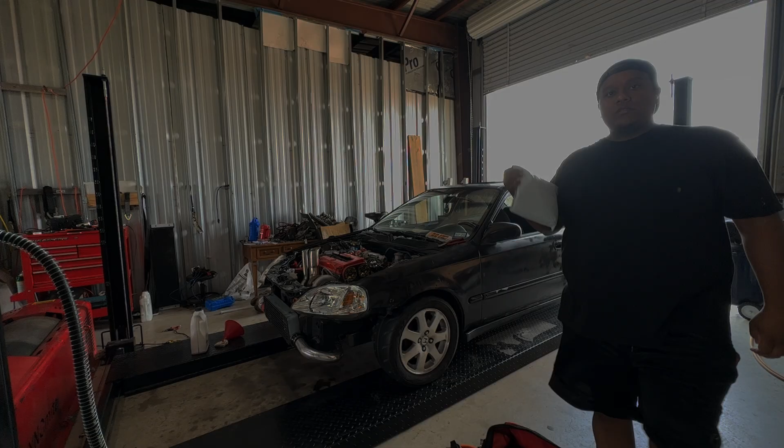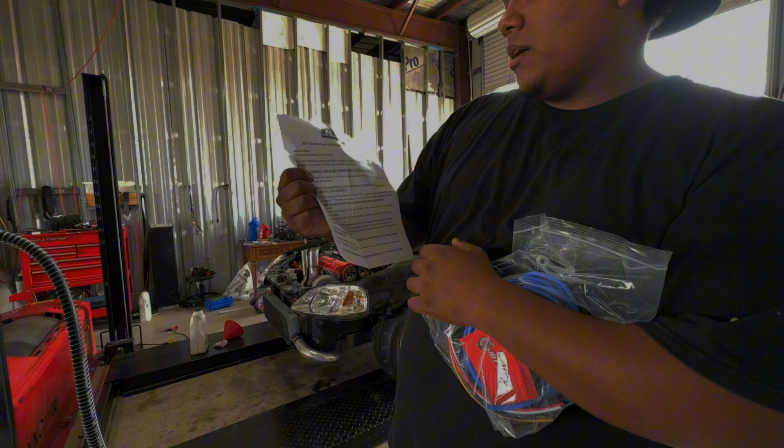What's up, guys? I got the JDT fuel pump hot wire kit, aka relay kit. This is it right here. JDT fuel pump wiring kit, JDT Racing fuel pump rewire kit. It comes with instructions.

Real men don't use those, so you got your hot wire. This is gonna go from your battery, so run it to your battery, but don't hook it up yet. It's got a fusible link here. Basically, you're gonna run this to the back, to your fuel pump, or where you're gonna mount your relay, and then it's got a couple little connectors and zip ties to tuck it away nicely.

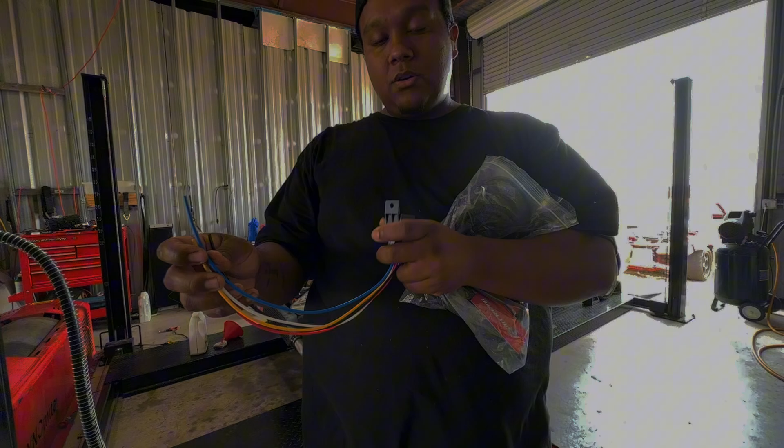And then this is it, basically just a generic relay. All relays serve one purpose: to control the low side circuit to a high side circuit. Really all you're doing is upgrading the wiring so that it doesn't overload the wire. It can melt wires if your pump is pulling too much amperage.

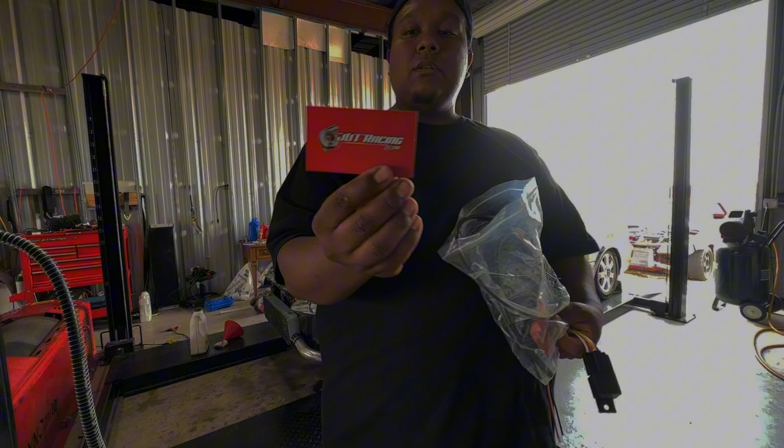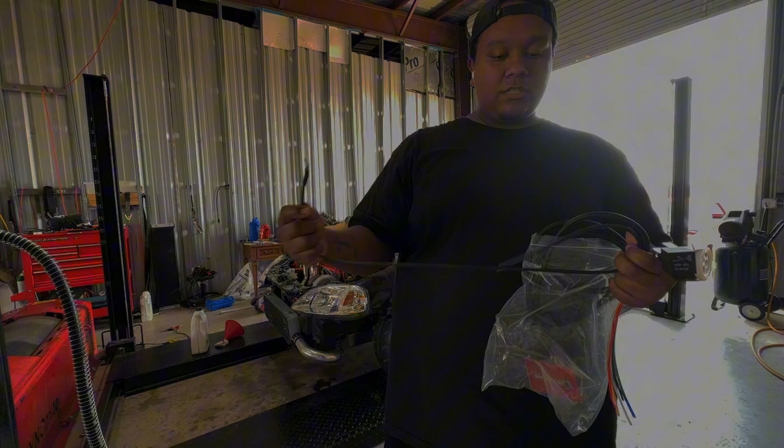Comes with a little separate ground. I like to use this ground for the pump hanger to chassis, even though it's already grounded to the chassis. It gives it more ground doing it like this. I haven't had any issues doing it that way. Then a little bit of loom to hide the feed wire.

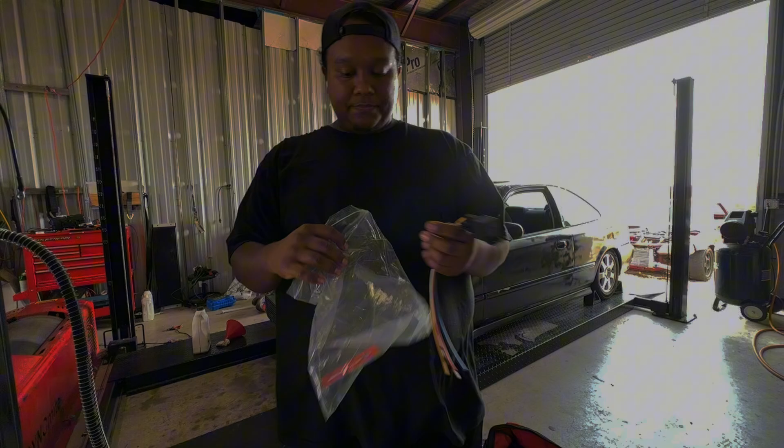So we're gonna get all that into the car. First things first, I like to find a nice place where this is gonna hide. You can hide wires pretty easy if you have enough wiring, but he's got interiors, so I'm gonna find a spot where this will mount or hide away.

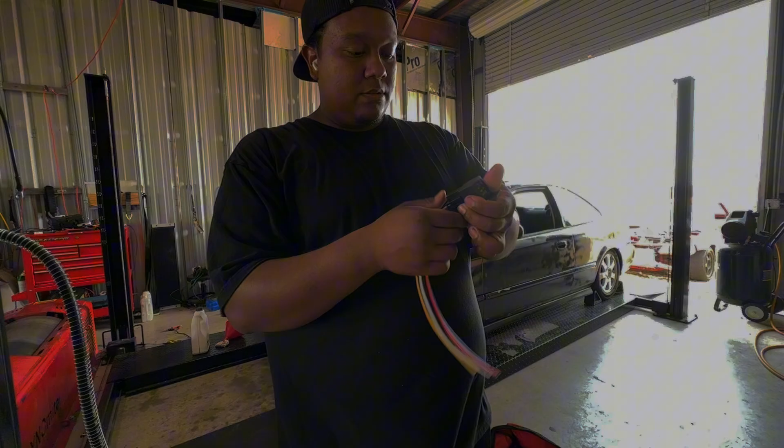Alright guys, quick little recap on the relay kit. We got battery in, we got relay ground, 12-volt signal from the stock pump wire, and then we got our yellow hot wire powering the pump, and we got a standalone fat ground. Keep all the heat and noise out of it. And let me prime it for y'all.

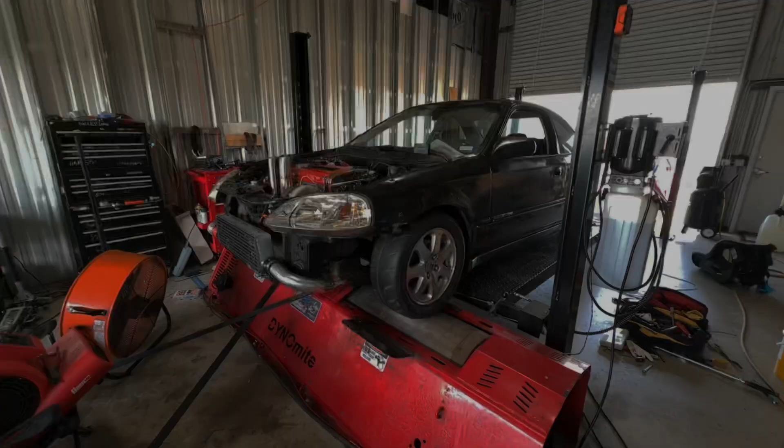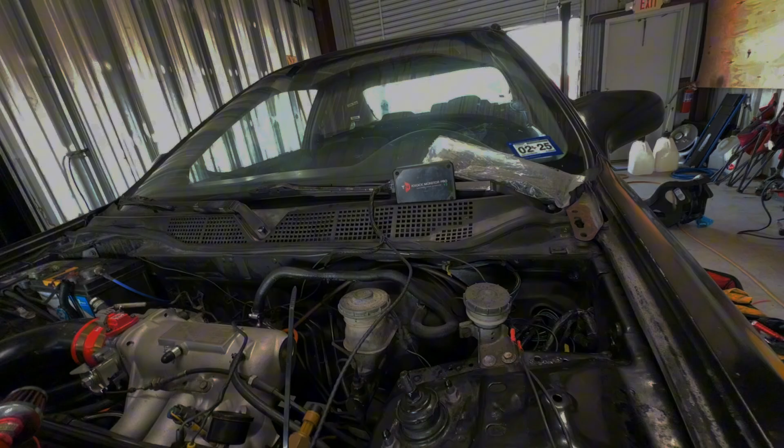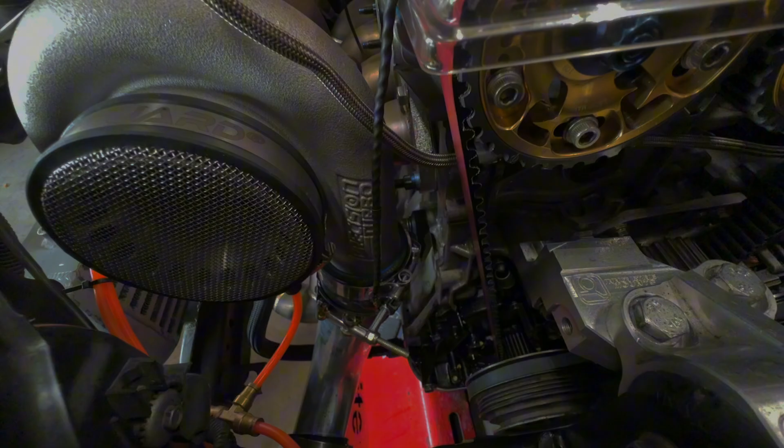Alright guys, I don't remember where we left off, but basically the 2000cc injectors are in with EV1 connectors. I got the injector RPM signal to the knock monitor pro, that is what we're using to make sure we're not in detonation. And the knock sensor is right about there. Yeah, I should be able to see it right there. So pretty much all ready.

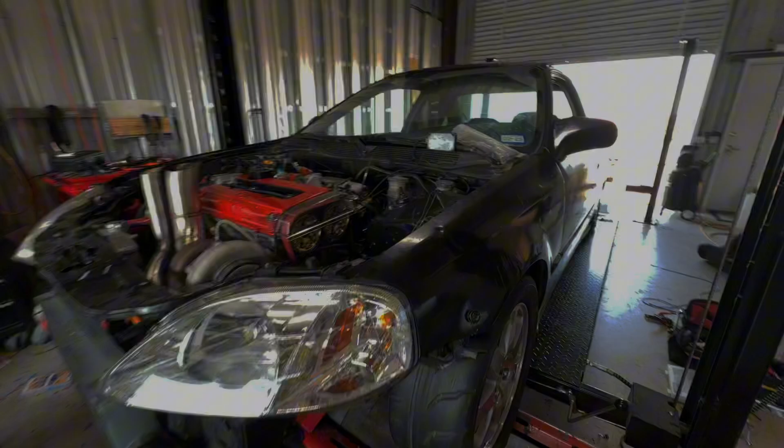Hellcat relay, just to recap: Hellcat 525 relayed fuel pump, E85, 2200cc 100 tune injectors, piston rod, LS VTEC precision 6262. Probably our limiting factors are going to be maybe the intercooler, and we're going to pray that we don't run into any detonation so we keep the stock sleeves alive. It is not block-guarded, no CSS sleeves, nothing - stock block with pistons and rods in it, springs, retainers, type R cams.

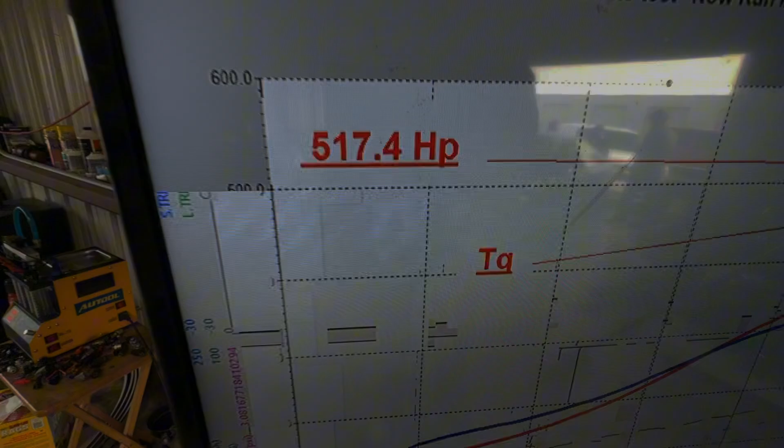Not quite 550, but we're at 517, 21 pounds. We'll let it cool down a little bit. We might try to put a little more in it.

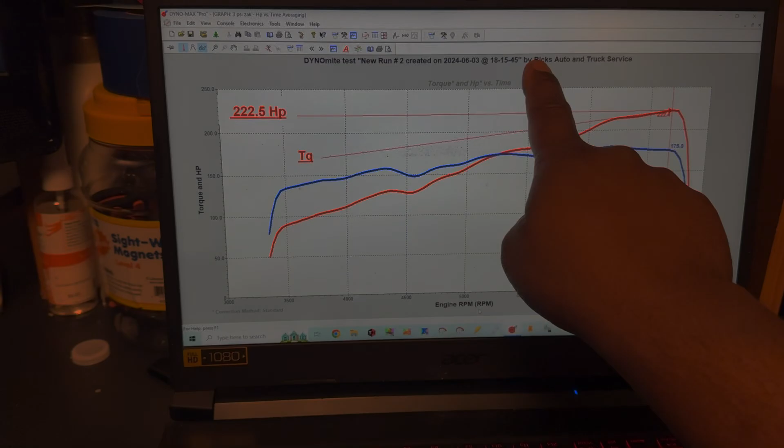Basically all the runs were on the tripod and it filmed the whole dyno session. I didn't talk to the camera or anything, just maybe one time to explain when we stopped around 515. But basically I'm just gonna run through all the dyno graphs. Don't mind this, this is the old owner of the dyno - it's not his test facility anymore. It is here at RACE-ALOT garage now, but I have not changed the license just because DYNOmite is actually no more, so it'd be hard to try to get a new license.

But anyways, here's the runs. We got, as you can see down here, 3 psi, basically all motor. I made 222, and then third pull, I don't know what happened - probably didn't hit the data logger. That was first. This looks like the first VTEC pull.

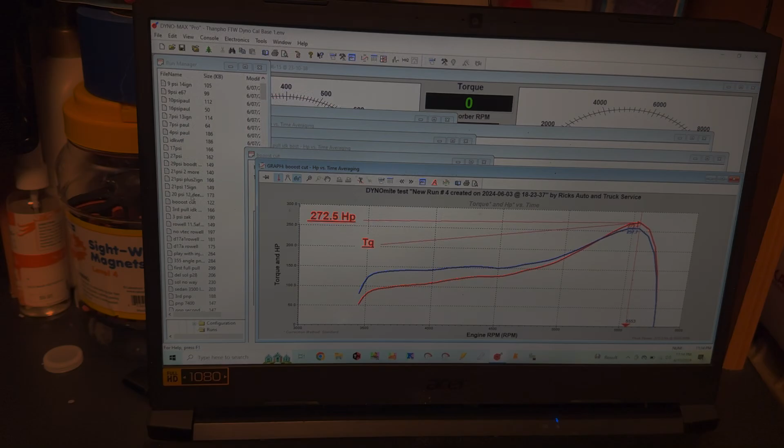Made 324, and then we got boost cut. We can see it was on the way up to whatever that would have been at 5500, and then looks like I raised the boost cut to 20 here, and this is 20 psi, and it only made 408 because we only had 12 degrees of timing.

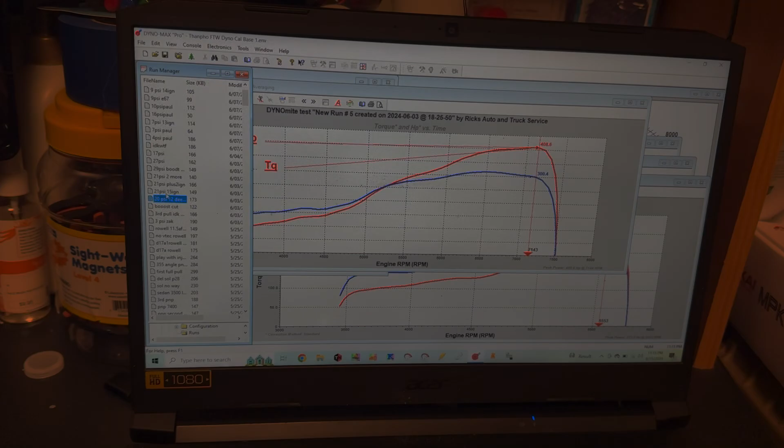So at that point, I'm pretty sure I started doing ignition. 21 pounds, 15 degrees, and these are all making the power at about 11.50 air fuel, some slightly richer, some slightly leaner.

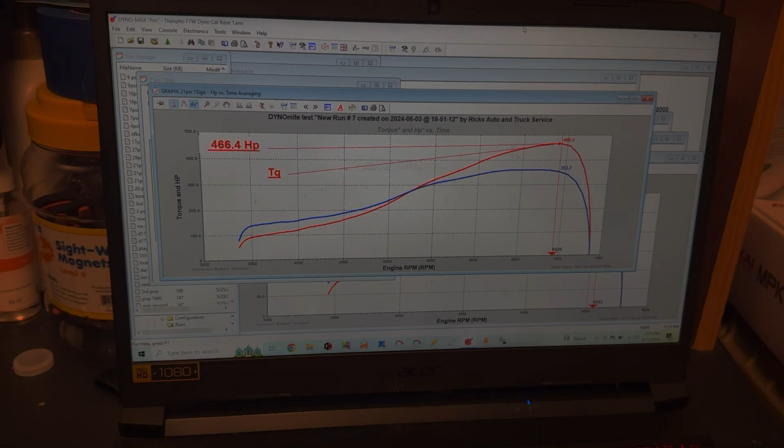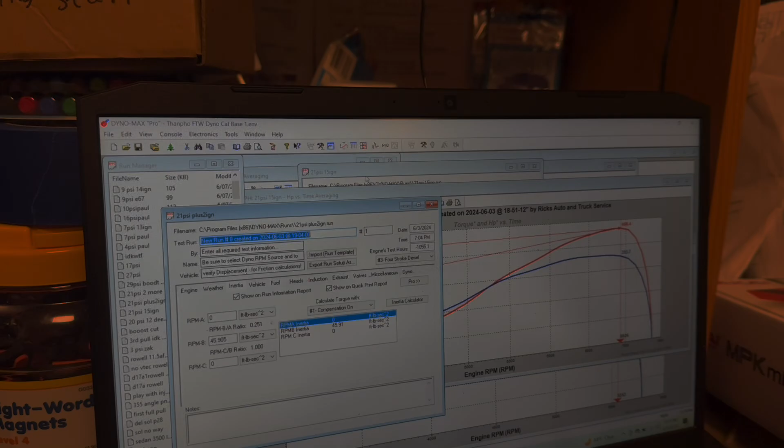So this is the same 21 pounds, but additional timing, and it made 460. 21 plus 2, this is timing only, guys. This is the power of running E85, being able to achieve damn near MBT on whatever boost you're at. As you can see here...

460, right? At 460 at 15 degrees, and then 2 more degrees, same boost, went up about 30 horsepower. That's a good sign that when your car goes up at least 10 horsepower per degree of timing, that means you're still...

Not at MBT yet. So I was trying to achieve MBT, meaning mean best timing or mean best torque. In this case, I was going for the max power, trying to reach the 550 horsepower goal that the owner had. 21 with 2 more, so we should be at 17, and then this should be, let's see, 15, 16, 17, 18, 19.

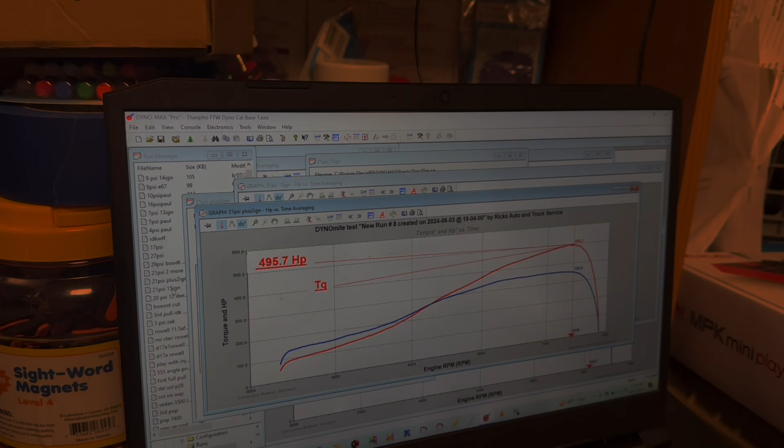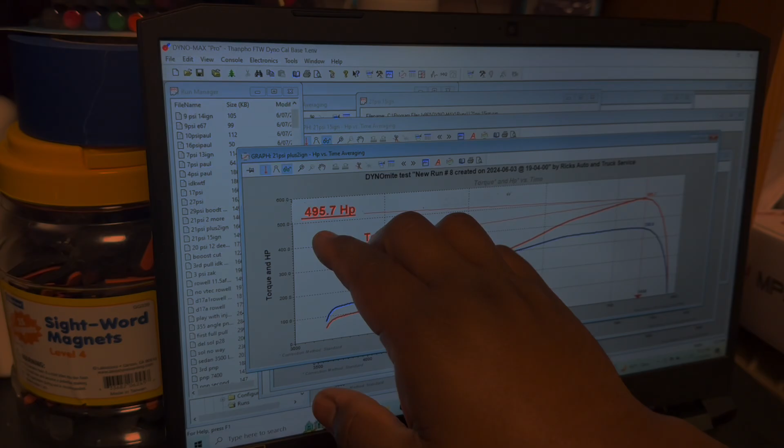This should be 21 pounds at about 19 degrees, and you can see from 17, you're not even making... somebody would call that 500, but at 21 pounds, we have not technically cracked 500 yet. So 2 more degrees puts us well...

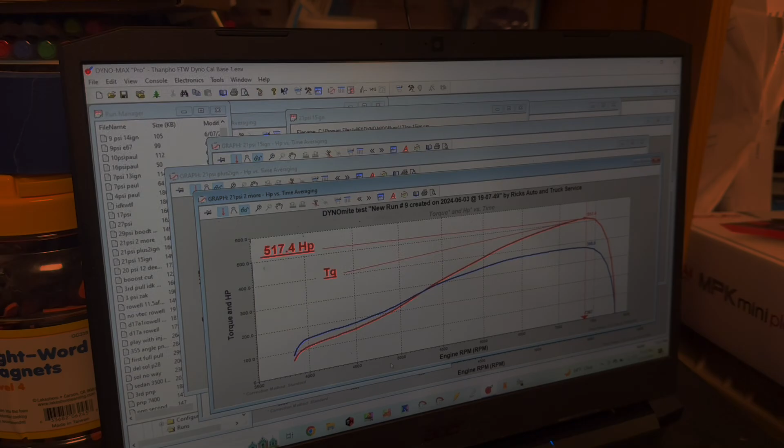Oh shit, I cracked. Hold on, I clicked the wrong one. It's back there somewhere, it's lost. Right here, 517, guys, with 2 more degrees. Officially, we cracked the 500 mark here on 21 pounds.

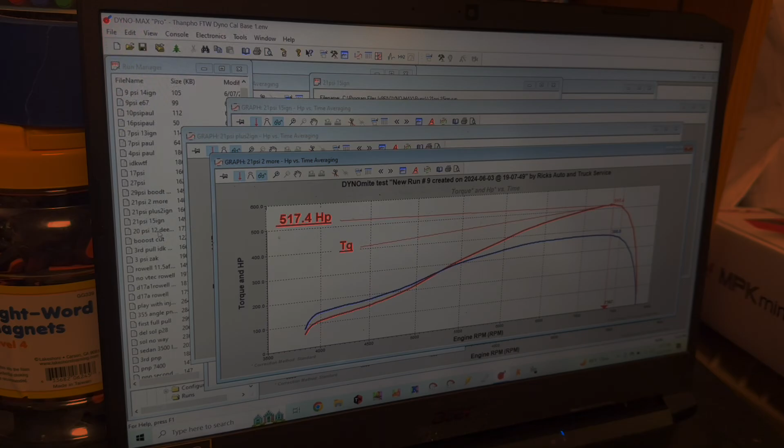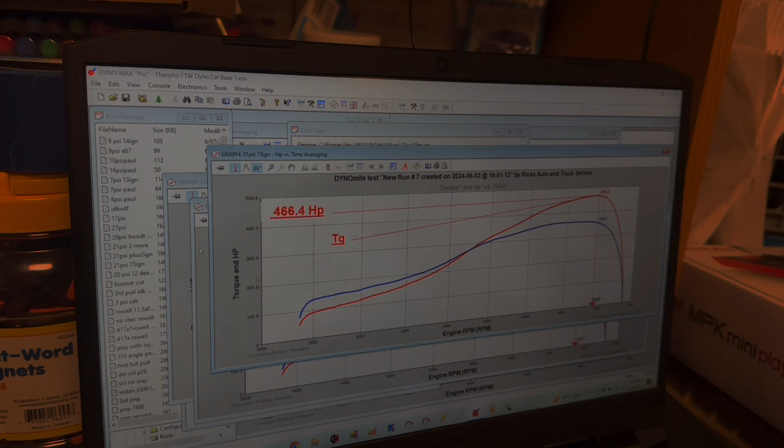Now, we were stuck, remember, we were stuck in the 460 range, 21 pounds, right? But only 15 degrees. So add 4 degrees to that, you're looking at if it's still on the way up to MBT, you're looking at 10 horsepower per degree.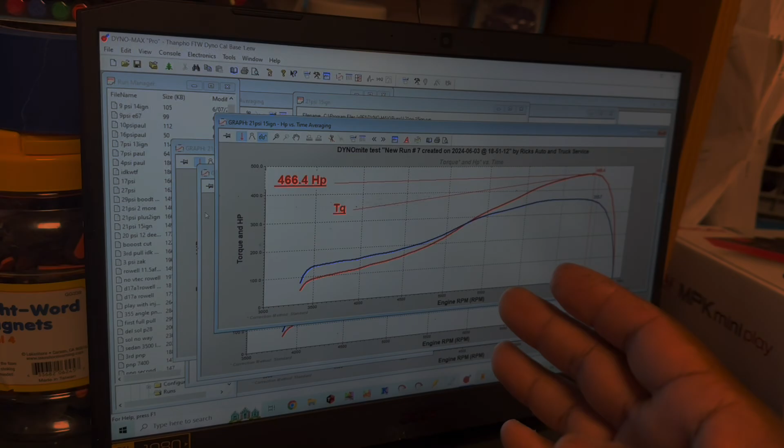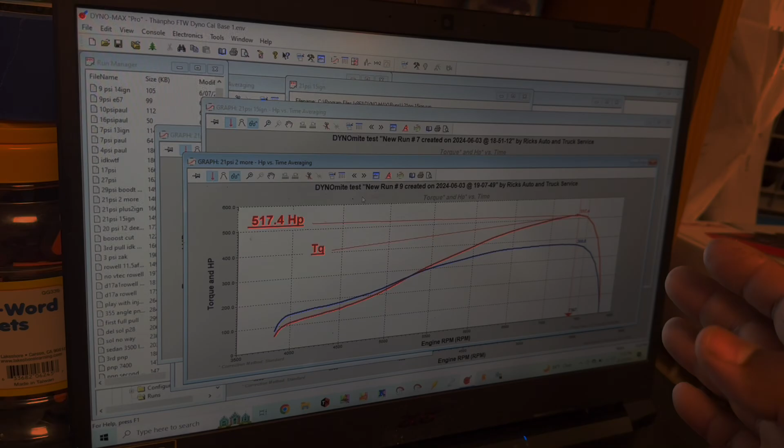So from 15 to 19 is 4 degrees. So we should see at least a 40 horsepower gain in timing only if we're still on the way to MBT. And this is the graph there, so you can see we actually achieve more than 10 horsepower per degree of timing. So...

This is 21 pounds at 19 degrees of ignition. Air fuel is still looking good and everything.

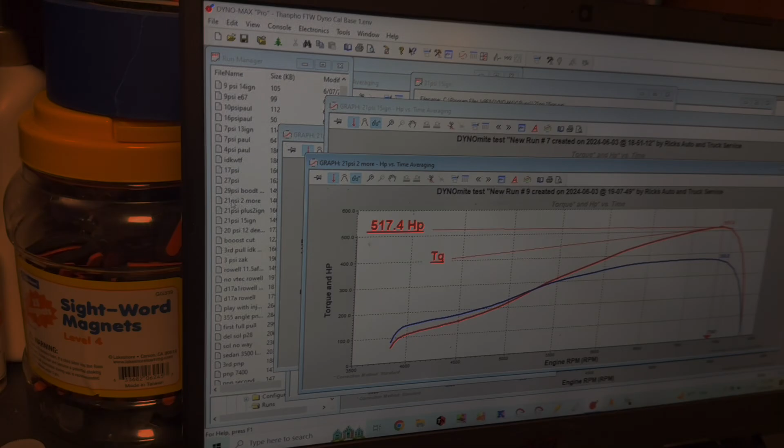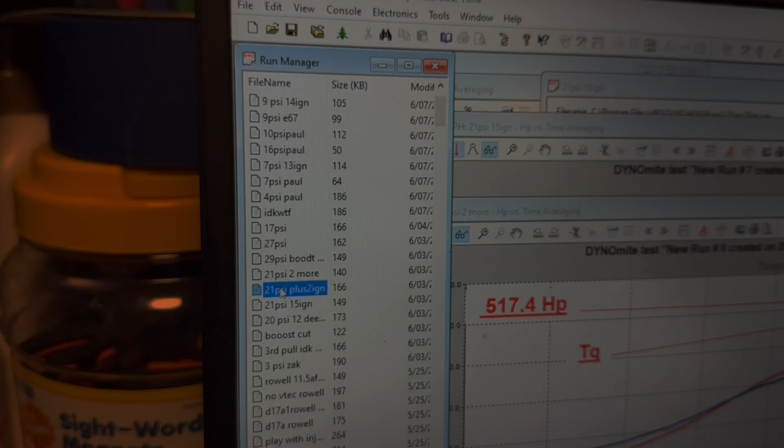And then I don't know if y'all can see here, I accidentally... I think I had boost cut already at like 30 pounds, but what happened here is I hit boost cut because I remember I was at 80% pulse width modulation on the electronic boost controller, or the MAC valve. It's a 3-port, and after this pull, I think it went from 80 to 85, and it ran away.

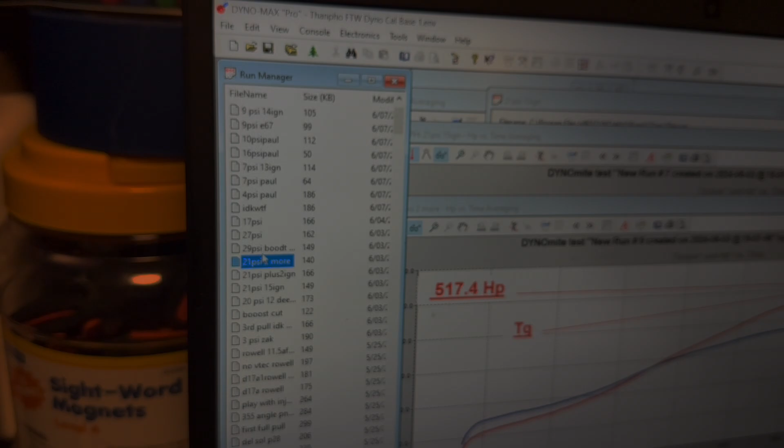I turned up boost cut, didn't save the run where it boost cut. I think it was like 415, and it was only at like 7,000.

What y'all are gonna see here, guys, is 29 pounds tripping the boost cut, and I highly do not recommend this on a stock sleeve motor, just because the 81 millimeters are known to be max effort at 500 horsepower, 600 horsepower, and numerous people have cracked the sleeves at 600 horsepower pretty regularly.

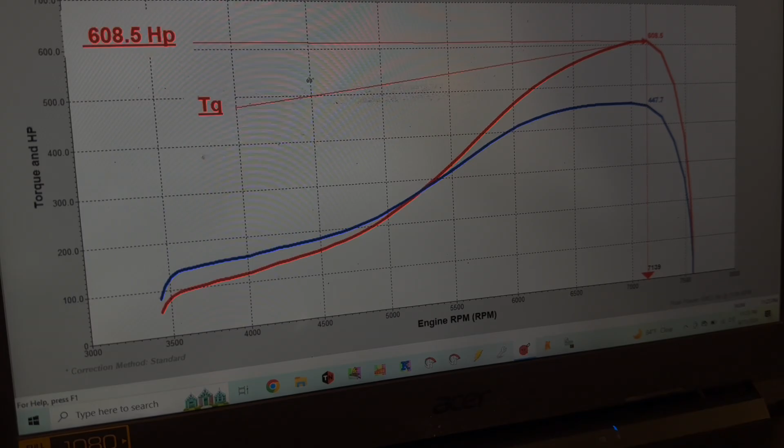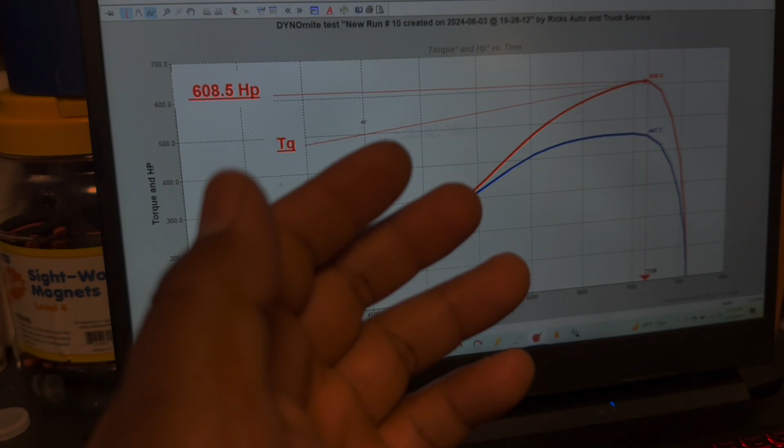Now this is very dependent on, is there any detonation during this time? Is there any harsh limiters during this time? Is there any pre-ignition, breakup, high EGTs, you name it, guys. The conditions have to be just right, and by just right, I mean you almost have to have a perfect tune and perfect supporting mods, a cooling system, your intake temps, your EGTs, your timing, everything has to be just right to sustain this on stock sleeves, guys.

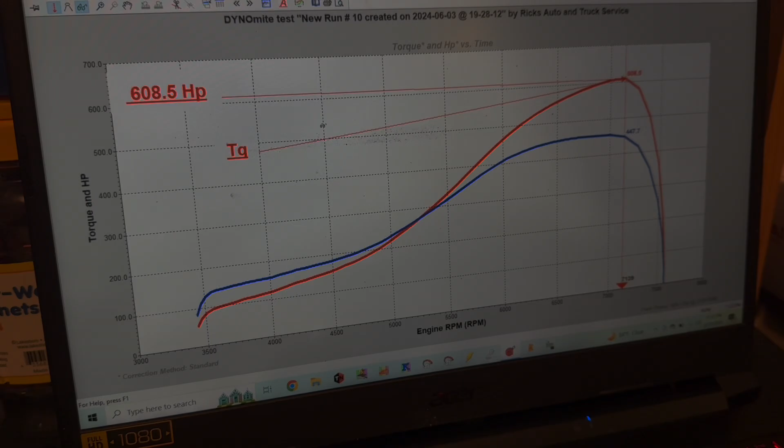By no means did I tell the owner that this is completely safe. I told him, look, 550 is already pushing it and we should stop there. But I was watching the wideband, and the air fuel was good, and it didn't hit a hard cut. It did boost cut at 7,000, so it was still on its way up.

But I told the owner, said, look, we should probably dial it back. Now, sometimes when you're on boost control, things can get finicky at that 80% range. The solenoid more likely was already capped out at 80%. So by going to 85, I basically shut the thing and/or stuck it open or stuck it shut.

I forget which one it is. I think normally closed is 0 boost on the 3-port, and then fully open is all the air going from the source to the top that the 3-port can flow. So that means whatever the 5-pound spring was doing, it was getting 29 pounds on top of it, and it was not really letting the gate creep open so much. So that's how come we hit the 29 pounds.

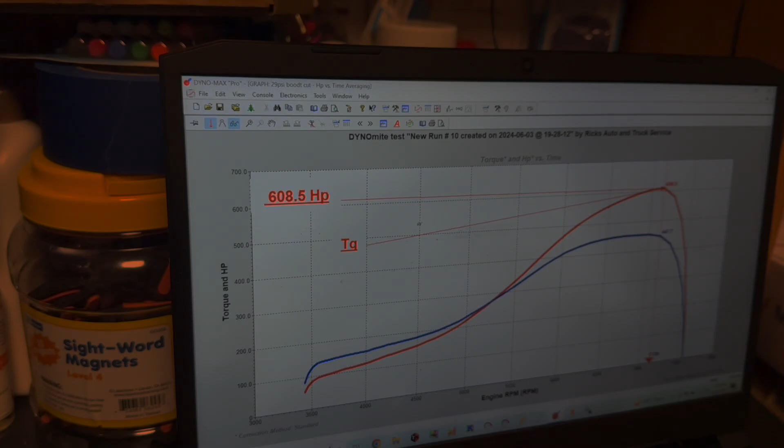And yeah, that netted us 608 horsepower and 447 torque. And for the H-beams, that's fine. This is the very tippy limit of also the Nippon Racing pistons.

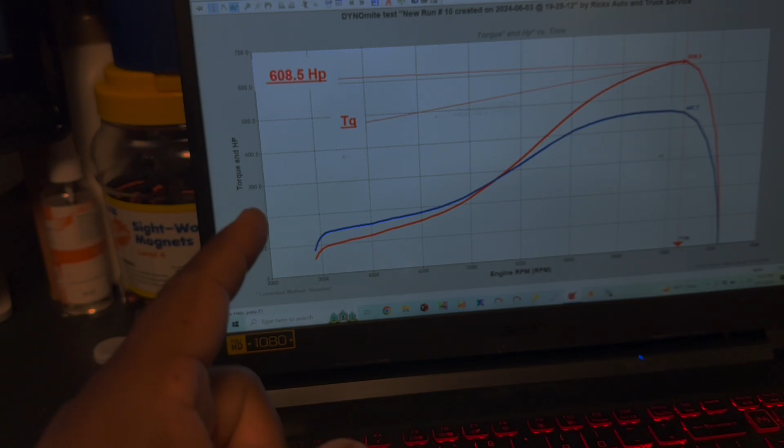Guys, that is a cast piston. It is not meant for 600 horsepower. I think on some of the ads, people claim that they're safe up to 600, 650. But like I said, the conditions have to be perfect. Had this been on the way up to 600 and I had even 2 counts of detonation, we may have let a sleeve go. We might have shattered the piston where the wrist pin sits. It might have blown through the piston.

I mean, you can't expect this on an unsleeved piston and rod motor to last super long. If anything, and it tunes on point and you never detonate, you never break up, you may last a little while. Not from the sheer power, you're gonna hurt stuff, but you might start to, I'll say, walk the sleeves a little bit.

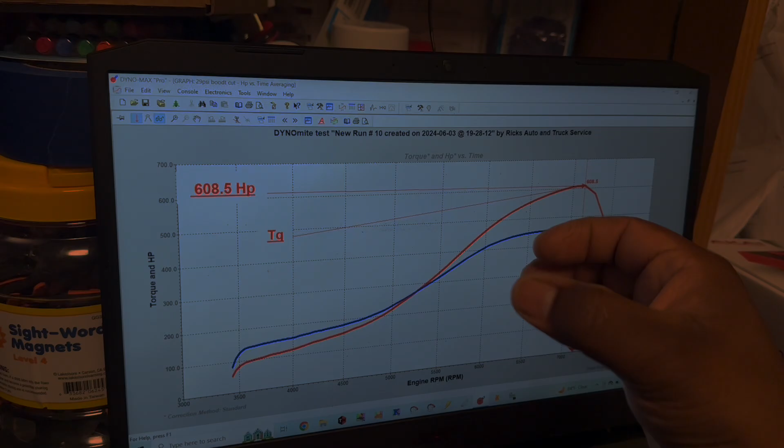And when you vibrate, say your open deck, no CSS, no block guard, no sleeves, open wet sleeves, stock sleeves, right, are just open, they can start to shift a little bit at extreme pressures they were never intended for, and the sealing ring of the gasket can start to have so much vibration that you can push compression out of there. This power can release and lift through the head, push a gasket, and that is kind of where you start running into issues at 600 horsepower and above with stock sleeves.

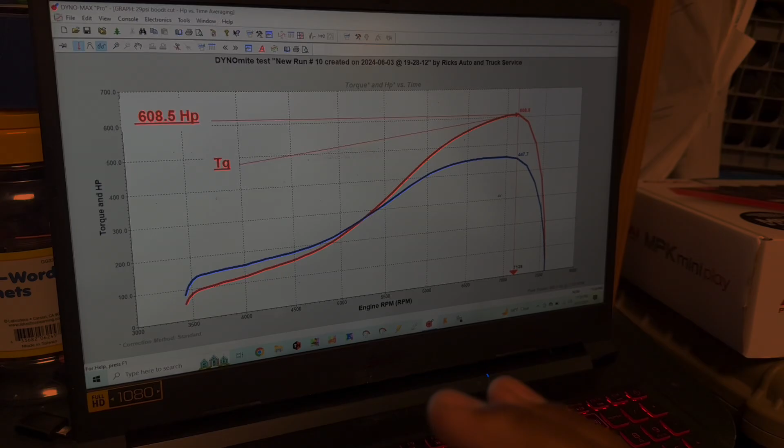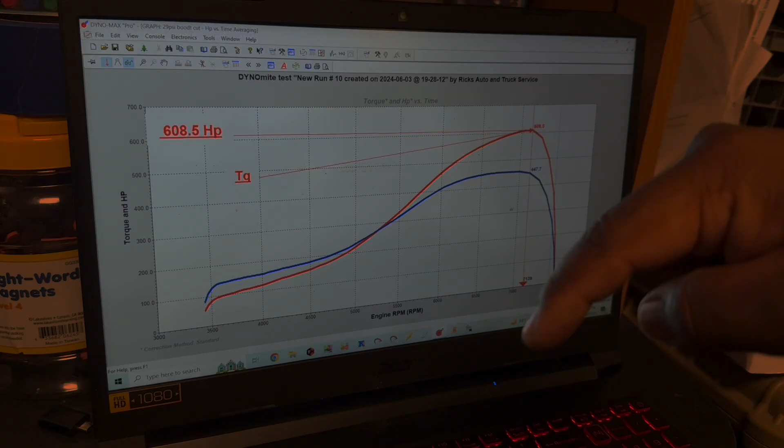Now, I did recommend the owner a JE Pro Seal, and I believe this is why we sealed the power without even pushing in an ounce of coolant. Because the JE Pro Seal has a very large ridge, and what I'm doing with my fingers, I'm imagining the cylinder, the sleeve, the stock sleeve, it's got a little indentation where it seals the compression for the head gasket, and I believe it's slightly better than a Cometic.

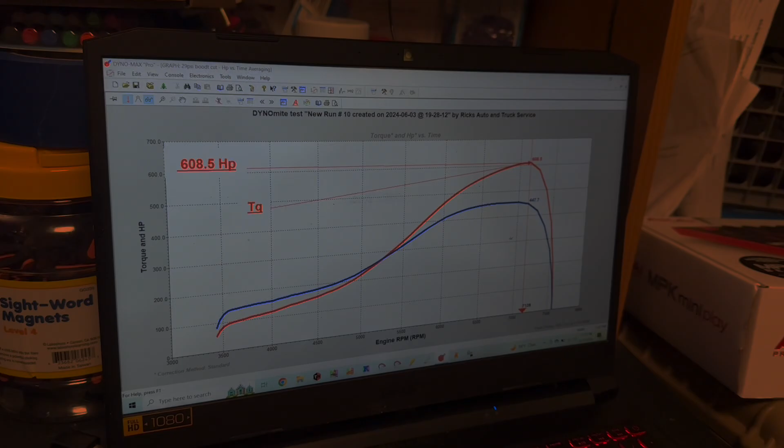A Cometic seems a little more flat, and when you squish it, yes, it glues down, and yes, if you have ARPs, you're clamping pretty hard, but the ridge is almost like a fire ring on a JE Pro Seal. I'm telling you guys, the block is stock, the head is stock, there's no fire slots, no grooves, nothing like that. This is a regular ARP head-studded JE Pro Seal motor, and that was the absolute limit that I would have ever tried to achieve.

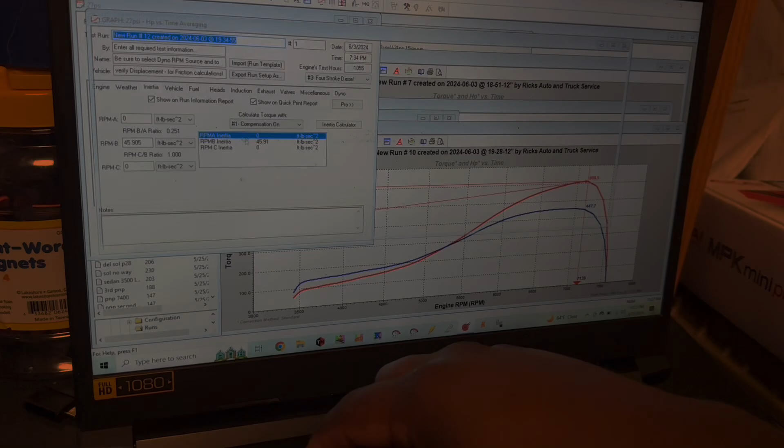But like I said, the air fuel were good. Basically I tried to dial it back just a hair, and we went down to 27 pounds, and this is pretty much where we left the car, at 27 pounds. He said, will it live there? I said, look man, we already got lucky hitting the 600 horsepower on these stock sleeves. I'm not going to promise anything.

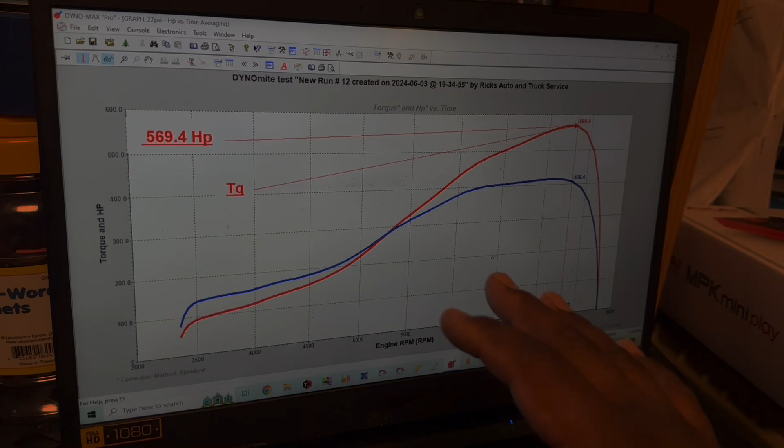I know the rods can do it. I'm sure the pistons will be okay if you're not sitting on limiter or having any detonation, which I did have the knock sensor on. We didn't have any detonation. This was around 18 degrees of timing, and I didn't feel safe going any higher than that to risk even a 1 count of detonation, because that could have been it for the engine.

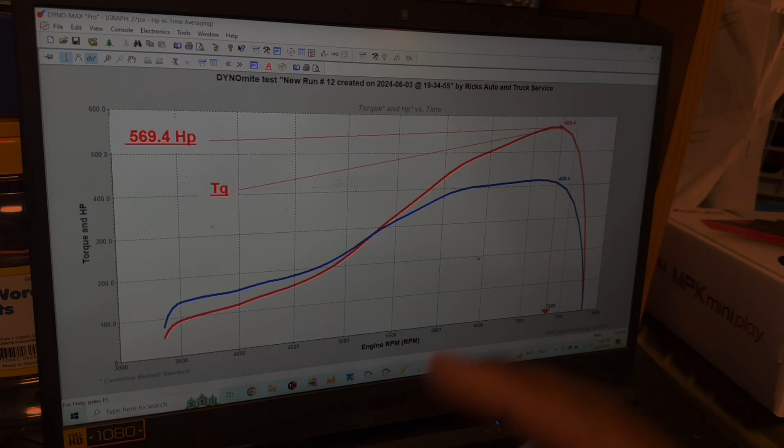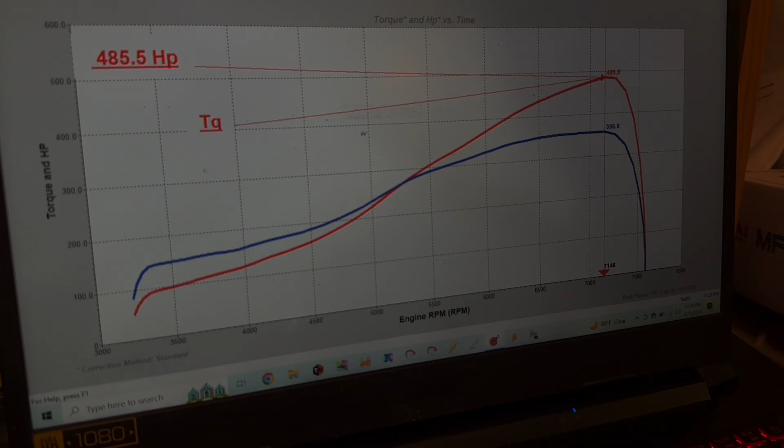So we turned it down to this. Y'all see him do a test drive on this 27 pounds, and it actually was creeping to 29 because it was loading up heavier on the street, boost cutting. So then he actually had me turn it down a little bit more, and this is at 17 psi, was in 3rd gear. So in 3rd gear we're looking at 485. That was about 60% duty cycle on the boost control, so that netted us the 17 psi, 485 in 3rd, and then 4th gear, it was hitting maybe 21 pounds.

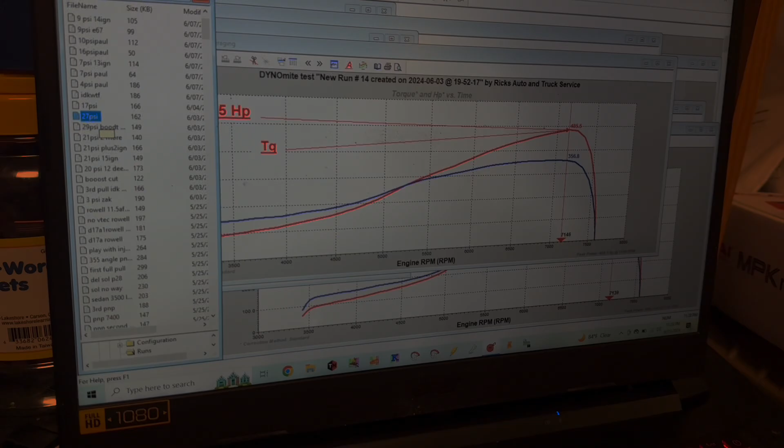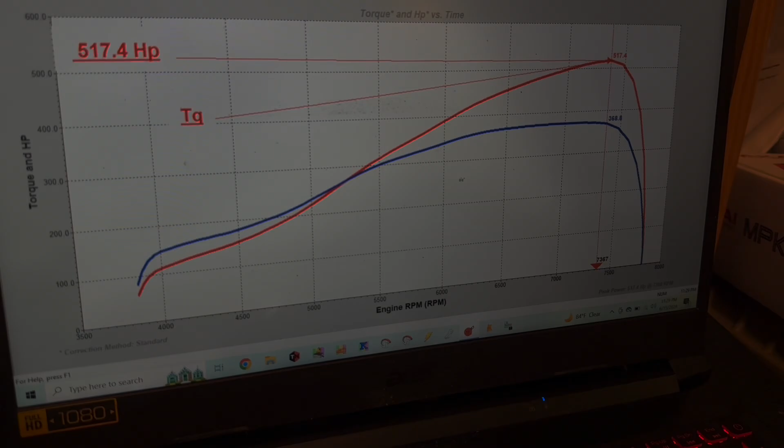So you could call it, this one right here, 21 psi is about 517. He did do a couple of 4th gear pulls, and it would hit about 24, 25. I never data logged 24-25, but I believe that was right around his 550 mark.

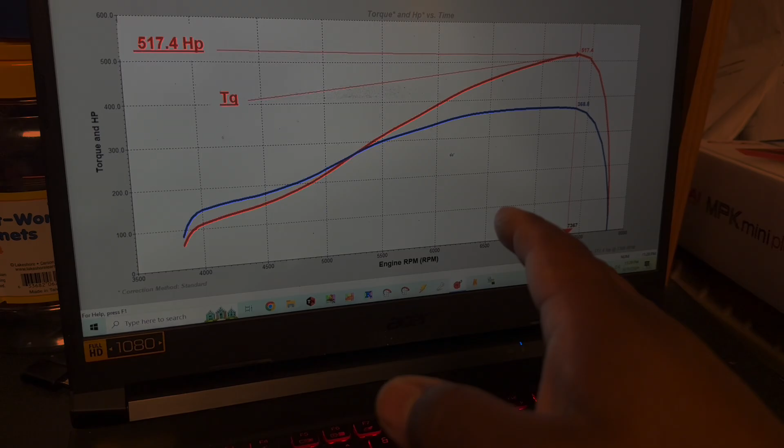And yeah, we pretty much have it there right now around the 21-22 mark, depending on how much traction you get, guys. This is a lot of power for fourth gear, even with a small tire, and if it spins, it technically doesn't fully load up. So he's in the mid fives, low fives, depending on traction. He hit boost cut a couple times. He actually melted the wastegate line.

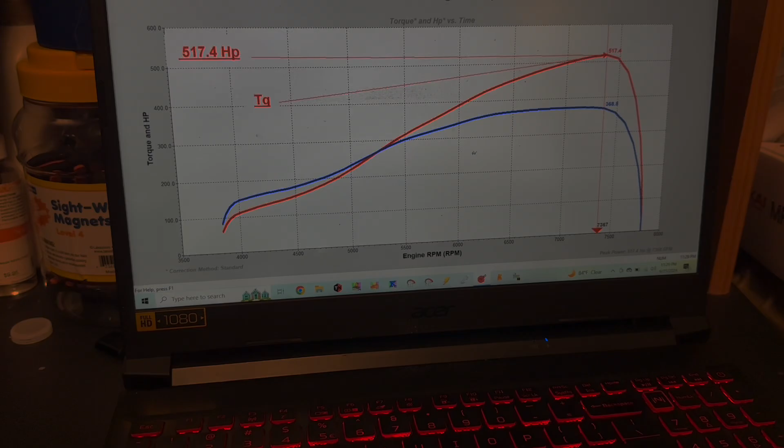But yeah, I just wanted to give y'all a rundown on the actual runs. I did not leave it at the 608. Now, if it's hitting the 29 pounds and loading up, then it is very well in the 600 horsepower range. And I told him we shouldn't leave it there, but it's his car, and he knows he signed the waiver, he knows the risks, and he's gonna get a sleeved block on the way, guys.

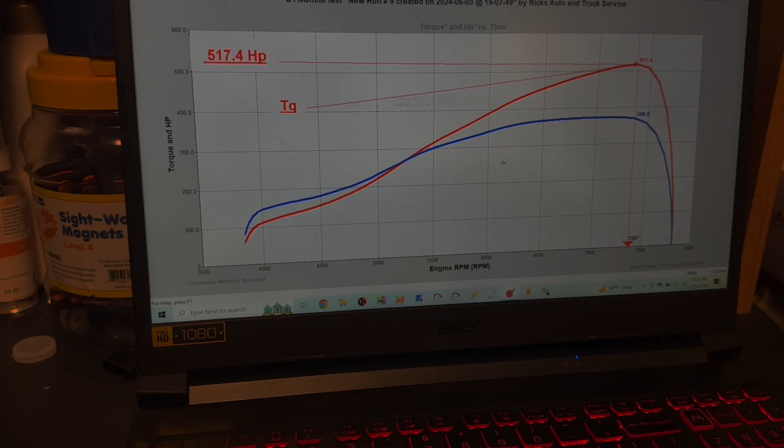Not super soon, not relatively soon, but we are not done here. That's where I want to leave that. We're not done here, so there may be a Zach part 5 here in the future.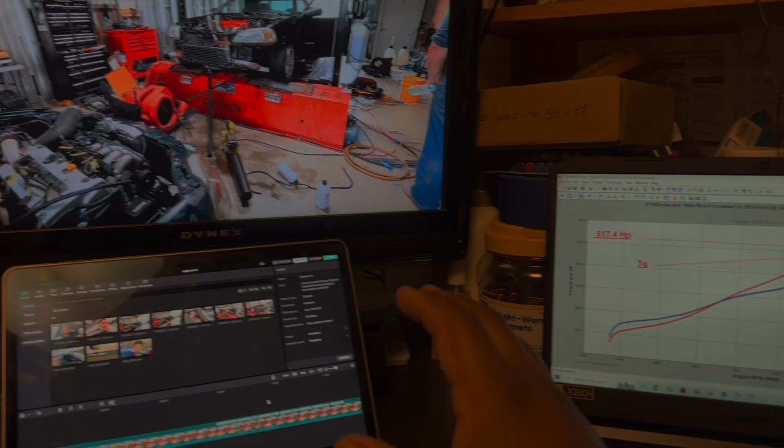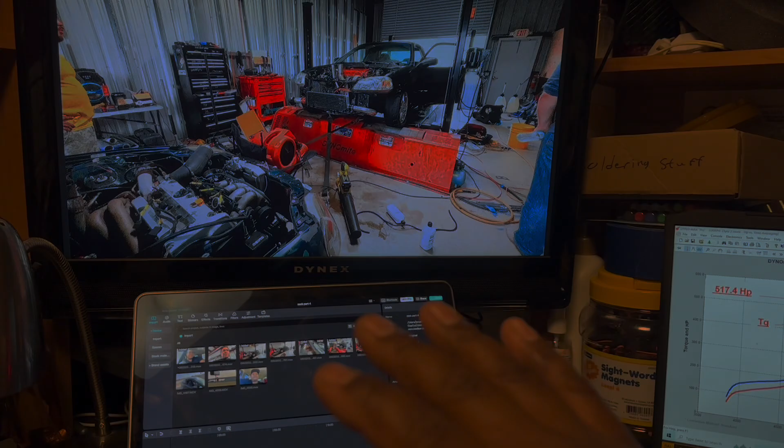I had a great time on my very first customer build, full build, in and out. Zach dropped the car off, said give me 500, and that's what we did. I'm very happy it was that smooth. They don't always go that smooth, guys. A lot of setups have hiccups, and there's a lot of things that can blindside you and ruin your dyno session. We did actually spin the alternator belt, it shifted or came loose, something like that. So we got lucky, we aborted the mission. 600, yeah, turn it down, get it off, clean it up on the street. That's what we did, and y'all will see a little test drive here and there.

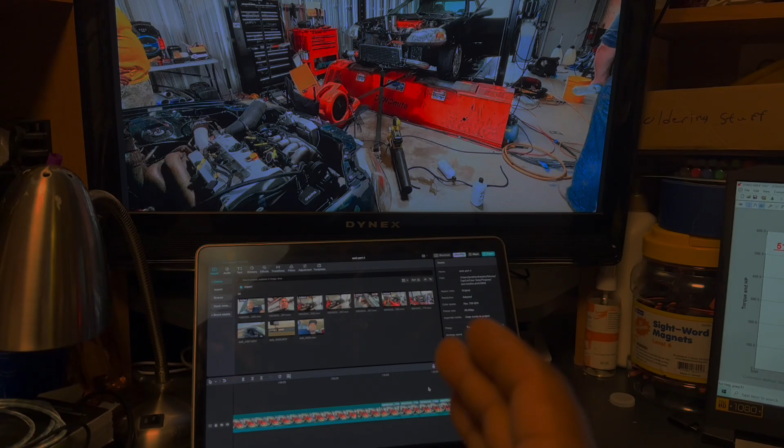Zach and Ram drove it, but the car was on the verge of spinning every single gear. So don't get mad, guys. It's been a long time for them to drive something like that, and it's not good on the road we were on with a street tire. We're hopefully gonna take this car to the track on a slick and see if it'll stick, but we just have the short little test drive. They weren't trying to go crazy and bang gears and miss gears, they were just kind of babying it, honestly.

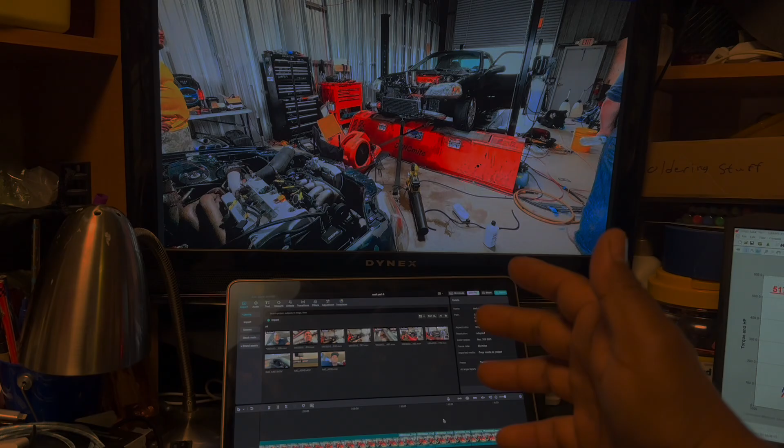I just wanted to film a quick disclaimer. I know I'm sharing a lot of information with you guys, and I'm happy to do so. I love sharing my experience as a tuner and builder, and sharing knowledge is where some channels shine, because the information you receive can be motivating for your own build. But I just wanted to throw a quick disclaimer: do not copy and paste values you see on the channel. You need to take your own approach. My approach is very simple, and it can be very effective. But if you think you're gonna plug in 29 pounds and 18 degrees, if you don't have the supporting mods to deter knock or contain that kind of horsepower, you will grenade your engine. This particular setup had enough flow not to knock at 18 degrees at 29 pounds. It had good enough intake temps. There are so many variables, guys. I just want to warn you, take this stuff with a grain of salt. Take it as entertainment. I'm not telling you that this timing and this boost is going to make this power in your car. I just need to throw that out there.

I'm willing to share my data logs, my graphs. It's no secret, tuning is a science, there's no secret to it. Take your approach, be safe, use the Knock Monitor Pro or some form of knock detection, and get out there and try to achieve what you're trying to achieve, guys, but be safe about it. Do not just copy and paste stuff. It's a blessing to have a dyno, yes, but you can achieve this kind of stuff on the street, monitoring knock and intake temps, and making sure you have clean ignition, reading plugs. We didn't show it, but we check plugs between runs, just to make sure the knock sensor isn't missing anything I'm not seeing, because I wasn't logging individual EGTs. So you can still burn a hole. It's not just knock that hurts a motor.